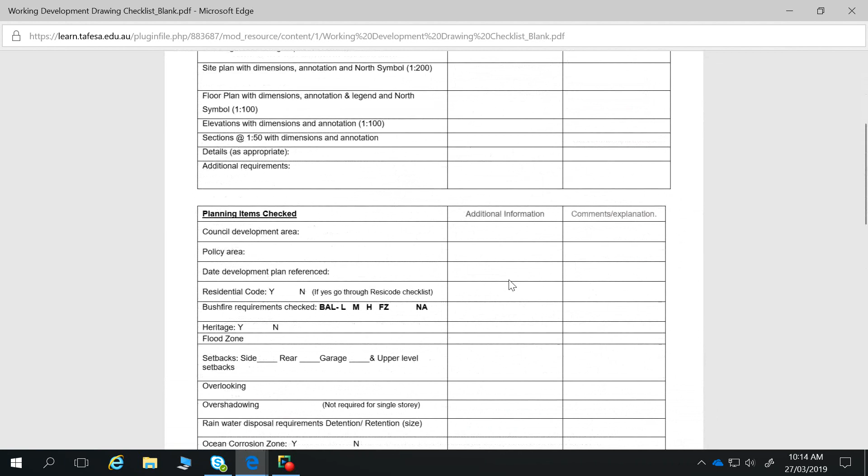I suppose before we look in too much detail about the drawing project, some of the things that are there for you on the Learn site to help you along - there's a development requirement checklist, and that's something you can go through quickly just to find out the sorts of things you usually need. I've gone through and done the sorts of things you would usually find out when you start to do a planning application - what do I need to know before I can actually start drawing it out?

What sort of drawings you need to submit, what you're actually going to go for - is it planning and building, or one or the other? What sort of drawings do I need to do? There's going to be a site plan, floor plan, elevation sections, details - so if you wanted to print that out and just write some notes as you're checking, it's easy, or you can save it and copy things, type things straight into it.

But some just additional notes - so if you see something on the council website that says your site plan must include something, you might put that in there, it'll just be a reminder. That's a quick way to streamline the process so you can find the relevant information and get started. But as you're starting drawing, you don't think, oh, was this what council wanted, you don't have to go try to find the information again, because you've actually written it out. So it becomes part of the client's job folder.

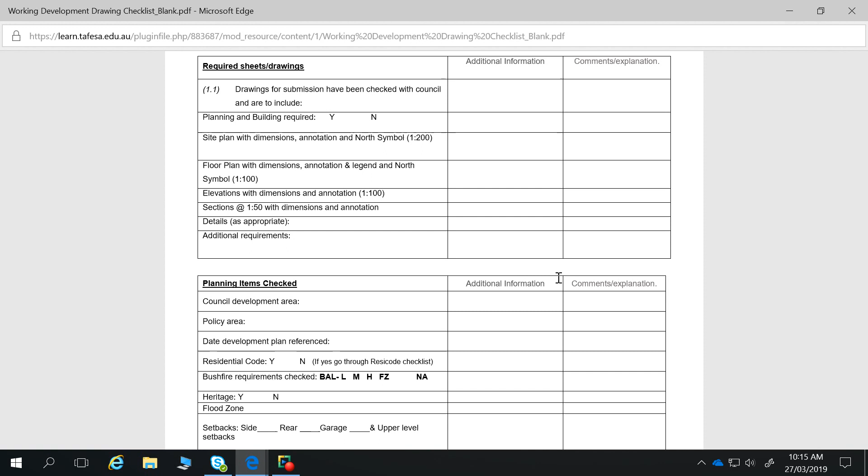And then when you start to get through for planning, what sort of things, what development area is it in? So this is going to be in the Tea Tree Gully area, that's the council area.

Has it got a policy area? What date did you reference the development plan? When you look at the development plan, what date are you looking at it? Because sometimes if a job goes for a year or so, if you've referenced something and you think, is that right? Or council comes back and says something, you can look and say, oh, that's because I looked back then, so at least you know why you've got something different if it changes.

Is it in the residential code area? Now this one won't fit in Resi code even if it is, because it was a larger scale development. The setbacks were different and those sorts of things, so we'll just say NA for that one - not applicable. We've already looked through the Resi code and what it is, we don't need to do it again for this assignment.

Is it in a heritage zone? That's going to be no. Is it in a flood zone?

What sort of setbacks are required? Just have a look in the development plan and see what the setbacks are. So 2-story usually is a metre on the lower level, or 900, but the second story they sometimes require 2 metres.

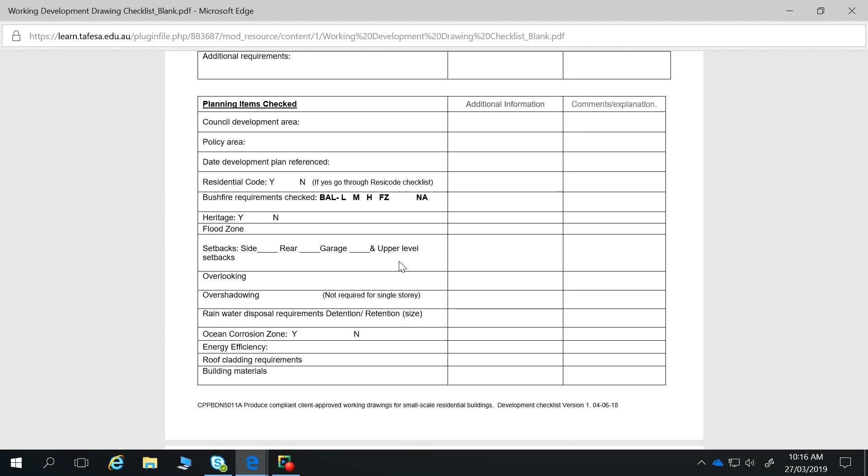Is there going to be, if it's two-story, which it is, any overlooking of neighbouring properties? Just have a think about that. You might need to get that property location browser up and have a look at the location and see whereabouts you think the site's going to look over. Is there any neighbours right there? Have they got some windows on that side, or even a veranda or something like that that you're going to look into? Is there any overshadowing possibilities?

So if there's some single-story places on the southern side of where you're building, are they really close to the boundary? It's good these days that even on Google Earth you can actually see who's got solar. So if there's solar quite close to a boundary and you're building 2-story, there might be some overshadowing possibilities there.

Rainwater - do you need detention or retention tanks, and what's the sizes? It might be that there's a minimum requirement. Usually there's 50 square metres of roof means at least 1,000 litres plumbed to the laundry or toilet. But some councils have a requirement that the rainwater tank can't be more than a certain height, so they don't want it to be higher than 2.4, sometimes it's even 2.1. I think that's to do with they don't want it seen from the street. It's a bit weird, but...

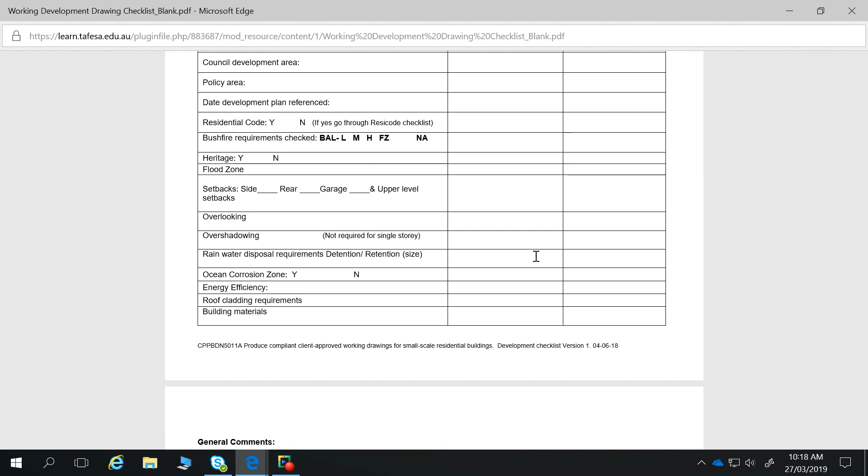Is it in an ocean corrosion zone? This will be no. Any energy efficiency rules or policies other than the rainwater tank? So if there's anything listed in the development plan, any roof cladding requirements and any building materials that they're looking for you to use or not use.

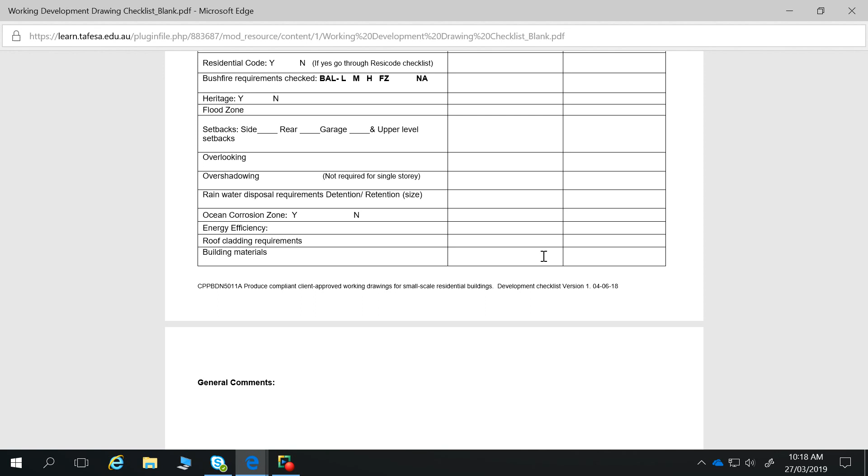And then there's a page there for general comments. Most places at your work would have something like this, that would be a lot more detailed that you would actually go through when you start a job. When a client says, this is my block, or you've decided they bought a block from you, whatever it is, you'd be going, okay, this is the type of house they want. How do we fit this on? What are the requirements? What are our rules around this particular house?

I've also put a site plan in there as a CAD plan so you can see, but I've done it as a PDF down further as well, so you actually get the site plan. We're going to be using this Residence 1 area, so when you get to plotting the site plan up, you can copy all this information, or you probably don't have to have the contours because it was benched anyway, but you'll locate your building sort of around here, and you can have a bit of an idea of how much private open space there was, whereabouts the rainwater tanks are going to be located, visitors car parking, etc.

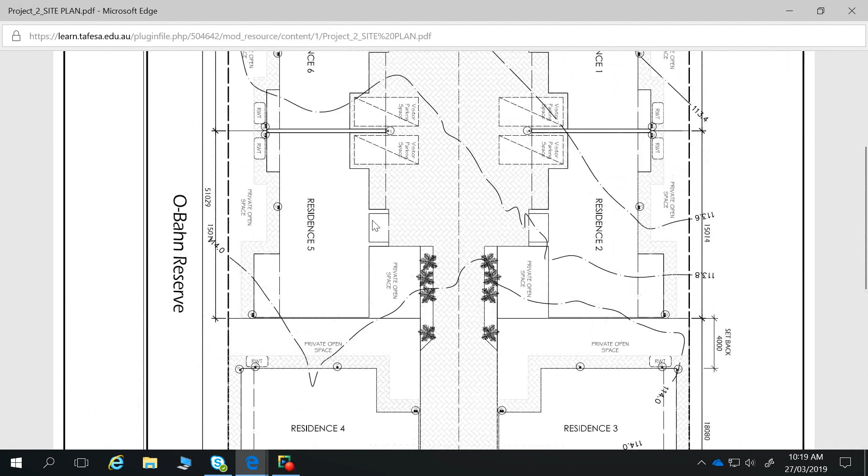And we'll probably still just do the whole site, but we just don't need to plot all the other residences. It'll just be this one here. And it sort of gives you your setbacks and things like that anyway that were used, so that way then you know all the buildings got to fit on the site.

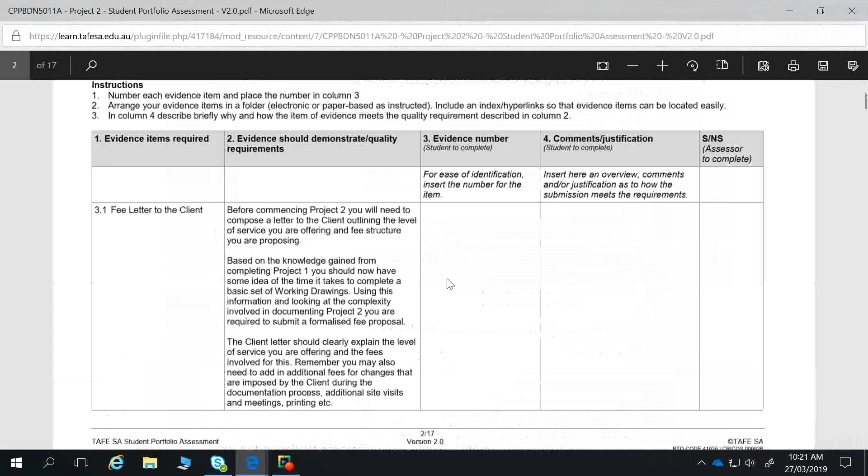On the sketches we looked at quickly last week, which are here in the assessment sheet - just scroll down to the bottom with the sketches. I've actually given you all of those on the design sketches anyway, so these are all the colours and those sorts of things. You can pretty well copy a lot of those notes, they're not going to change for us.

So similar to that, you've got the roof sheeting written in there, the type of garage door, the stainless steel marine white, the PGH Santorini block piers at the front for the portico, and the colours of the texture coating. There's a bit of a feature band around the house as well to break up the big blank walls, and also to hide the joins for the hebel, which we'll talk about today.

Then there's the texture coat colour, cappuccino candy 6, cappuccino candy 1, and cappuccino candy 6 with a sandstone paved block at the front. Wasn't very exciting, the colour scheme of this house, I can tell you now. So you don't have to worry too much about coming up with those - I've given it to you because in a design stage the client would usually tell you what they wanted anyway. We're past that, if you imagine, we're just documenting it.

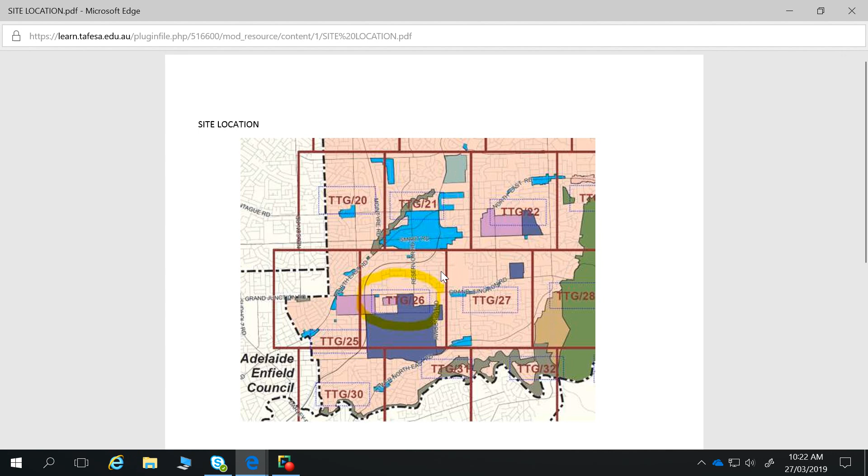The other things in the research there is the site location, so it just gives you a bit of a snip out of where that is from the development plan. I've already put up, just to give you a bit of a heads up, the actual framing and truss information.

Which usually wouldn't get until you finish that letter to the client and those sorts of things, and the engineer - but because it's the first time you're going to be interpreting that information, I'll give you a bit more of a chance to have a look. With the framing details, these are all from an engineer for the actual job.

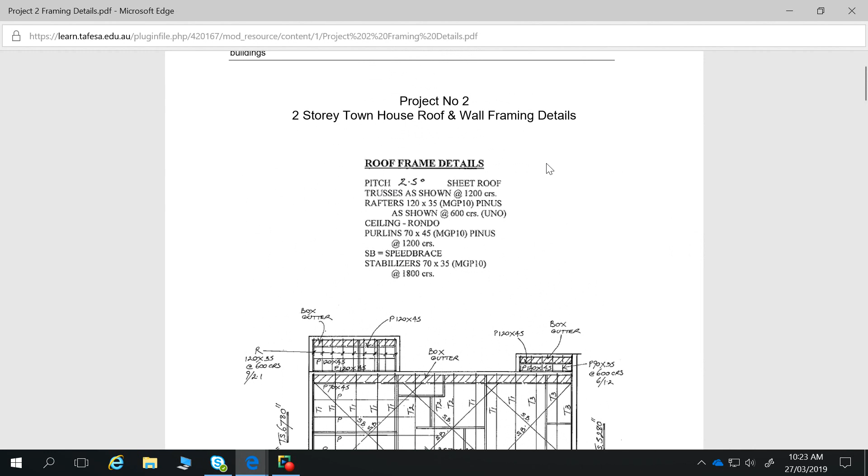We've got all the roof framing information, so have a little read at the top as well, because that gives you some general information - the set out of the trusses, the ceilings, the rondo, the purlins that are going to be used, the speed bracing, and any stabilisers that might be in there. Then on the actual drawing, the sketch from the engineer, is all the details of where those things are.

So we've got all the P's are purlins - you can see here there's a P 120 by 45, so they're these purlins running this way. We've got another purlin there, and we've got some rafters at 120 by 35 running this way. So the lower roofs were actually rafters and purlins done traditionally.

And the main roof up the top was trusses, so that's T1, T1, running this way. Then we get these T2s, three of them, because they run right through the portico at the front, so they were longer. Then back to T1s, and then the shorter ones, because of this cutout of the building here, are T3s. They all have the same pitch, but some just extend longer or shorter to reach the end of the building.

Now they had a cutout at this end to allow for the box gutter, so they were actually manufactured with that allowance for the box gutter. We'll look more at these details as we start drawing, but just so that you've got a bit of an idea of what it's talking about.

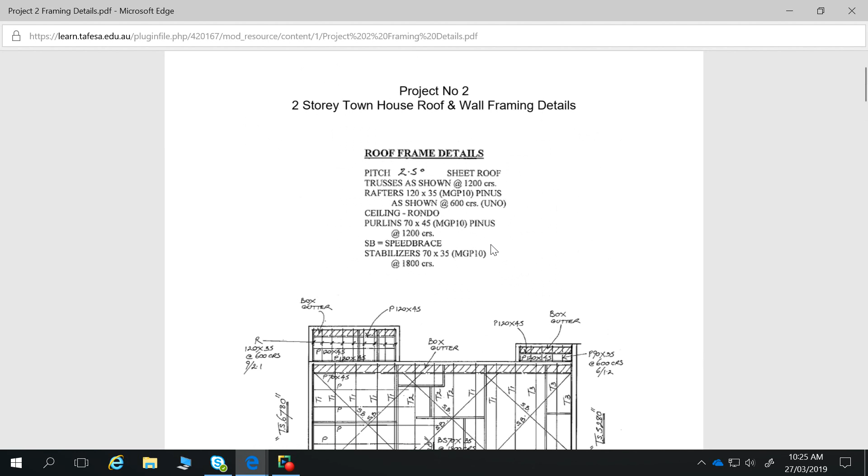The SB and all these ones going this way is the speed bracing, so it refers to speed bracing here. You won't have to draw any of that in, you just have to allow the right height for the trusses and do the box gutter detail. So in your section, if you're drawing the location of the trusses, you'll now know that they're at 1200 centres, so you want to have them spaced like that if you're showing something.

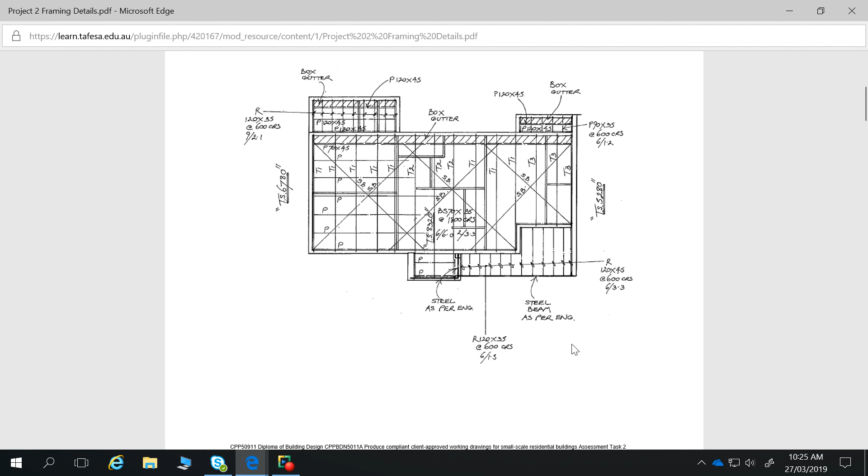And the front little roof over the balcony is done with rafters as well, and there's a couple of steel beams there that you'll just put as steel beams to engineer's details in your section, same as this note here. It's got your wall bracing.

It's also got the floor trusses, so a similar sort of drawing that shows all the stabilizers and different size trusses going through. Where you see the packers, it means the trusses were actually smaller, allowing for a step down in the wet area, but where they run past the wet area, they pack the top of that truss up so the floor becomes level with the bigger trusses again. So that's what the packing is.

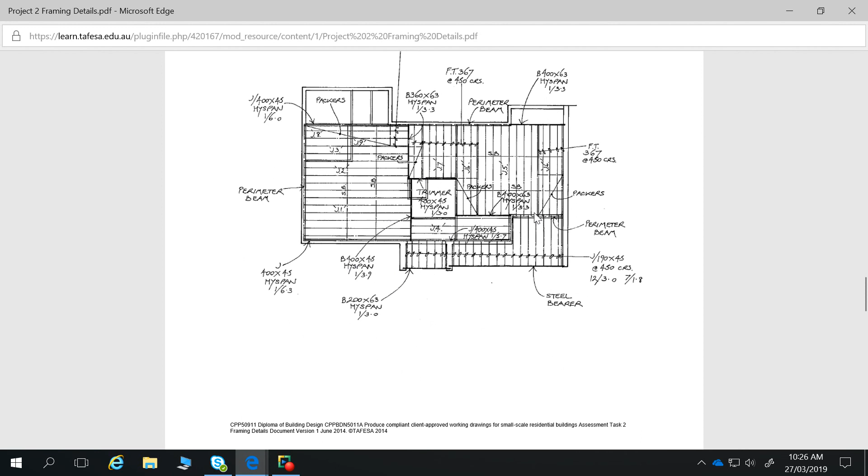There's also some quite big Hyspan 400 by 45 beams around where the stairs are, and there's actually a perimeter beam that goes around as well that's quite big. So the perimeter beam is 120 by 35 there.

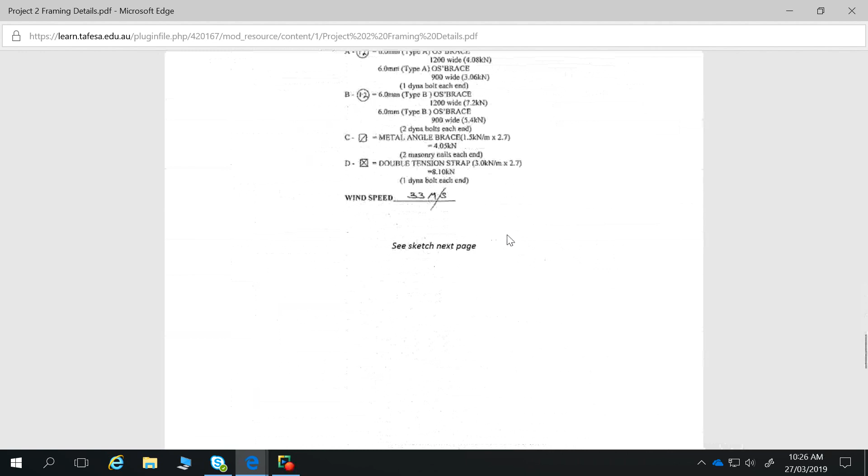More bracing for the other levels. And the truss information here has actually got all the truss info that came from the engineers, with the heights, the sizes, and the lengths. So you've got your cutout for the box gutter at the end.

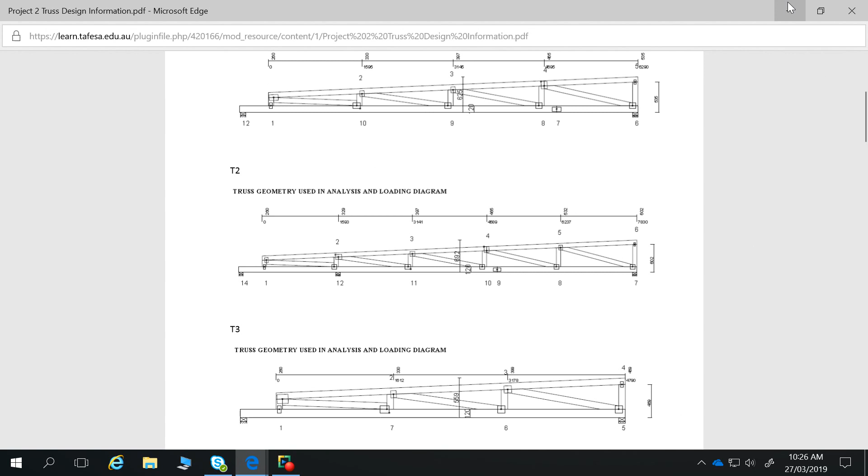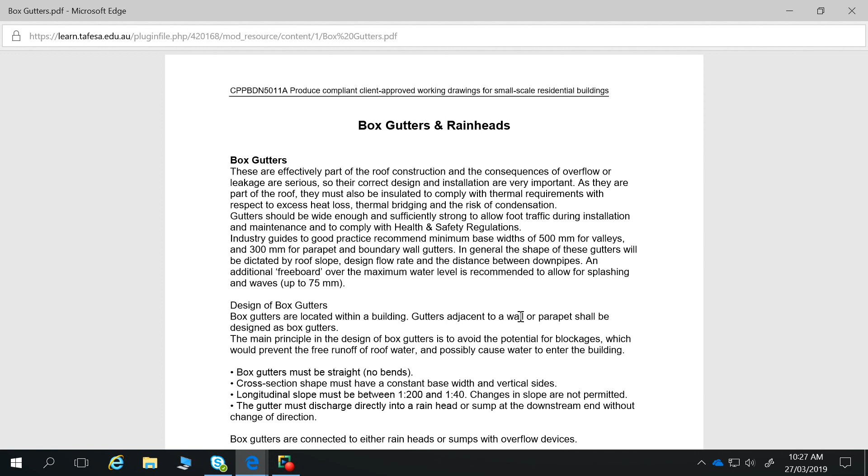When we get to doing the box gutter as well, I've got a fair bit of info, so we will go through that in the morning session of how we design box gutters. I have given you the sizes in the specification that you need, but I'll talk about where that comes from and give you an insight of how we would design a box gutter. So that sort of info I'll leave up there as well.

A link to the Hebel site, because the cladding is Hebel.

So we're in this multi-residential area, and when you go into multi-residential, we're going to be using an inter-tenancy party wall. That's going to be the party wall on the end where the next unit would usually be abutting. We don't have to draw up the next unit, but we need to show the party wall. And we're then also going to use some external wall cladding.

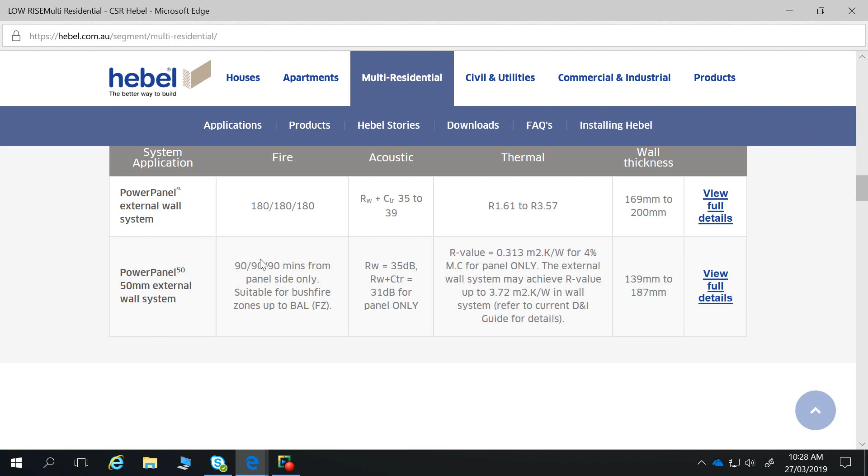So this is sort of some units that have been done as well, and there's lots of details through here. So we're going to use the PowerPanel external wall system. The PowerPanel50 wasn't around when I did this project, so we'll use this traditional one here.

And it gives you a heap of information there of how it looks, a bit of a rundown of that sort of thing, and you can go in and actually download one of the manufacturer's details if you want.

Hebel installation is the design guideline, so it saves you sort of looking. I've already just copied it down and downloaded it for you, so you don't have to wait for all that to happen. One of the most important things about this Hebel, there's two things - one I mentioned last week, it can't be cut shorter than 300.

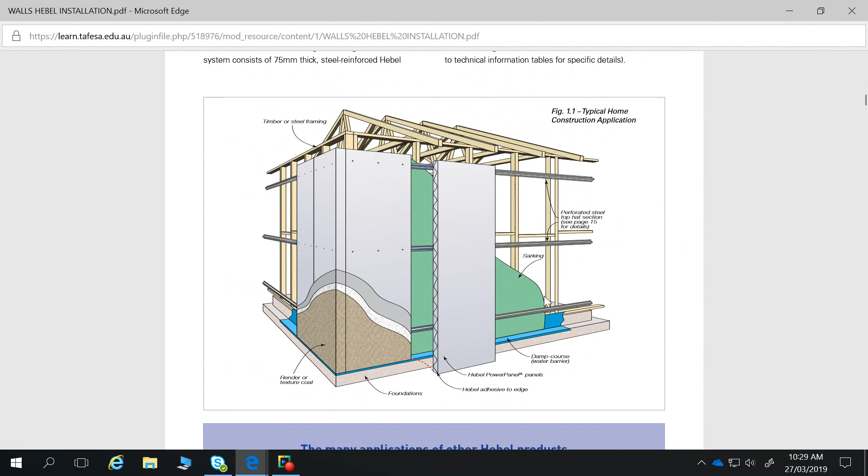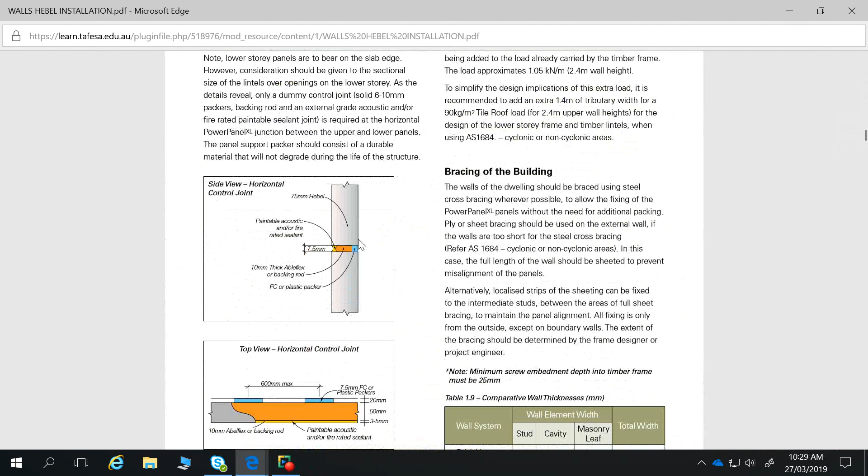When it's fixed to these top hats in a two-story situation, you've got to allow some control joints. Now what tends to happen on a two-story house is that the panels are so heavy on the top floor, and we're using pine frames, the pine actually shrinks after a while with the weight. So they allow a 25mm gap between the top panels and the bottom panels. So on the top level, the panels are placed, and when they do the bottom level, depending on which one they do first, they leave a 25mm gap around the building.

Obviously we don't want to leave that gap visible, but usually what they would do is either put some silicone in there and texture coat it so it looks smooth, or a better way is to put some sort of foam extruded band around the building. That's what we did, because one of the things council didn't want with some of the large walls was just these plain big rendered looking walls - they wanted a bit of articulation. So by putting the band there, it achieved two things: one, it broke up the spans of the wall, or the height of that wall, and two, it allowed us to have that 25mm gap.

So the foam band was actually stuck to the top portion of the top panel, but on the lower piece it was glued there. On the bottom panel, it just sits over the gap, over the top. So when they do the texture coat, they actually slice it underneath as well and put another bit of silicone. Then as that frame shrinks, the foam panel just drops down a bit, so you don't actually see it squeezing. If you just put silicone in there, what happens when it drops is it actually bulges out. And if you look around at a heap of Hebel apartments over the last year or so, now that they've started shrinking, you really see that line because the silicone has bulged out a little bit.

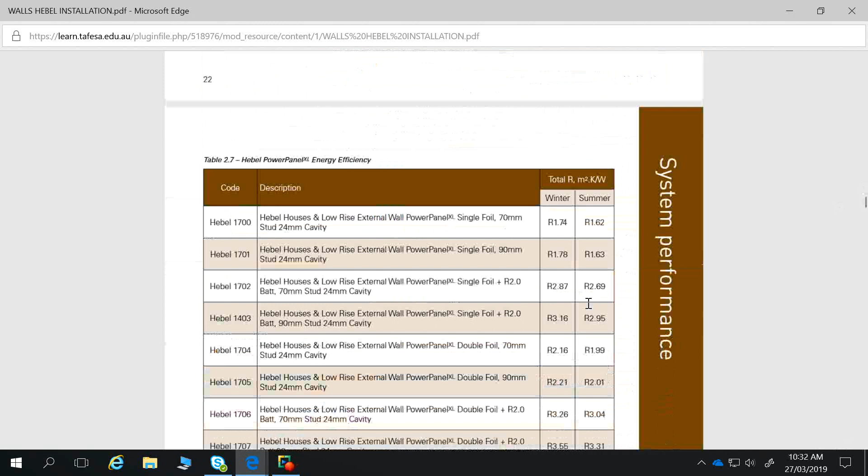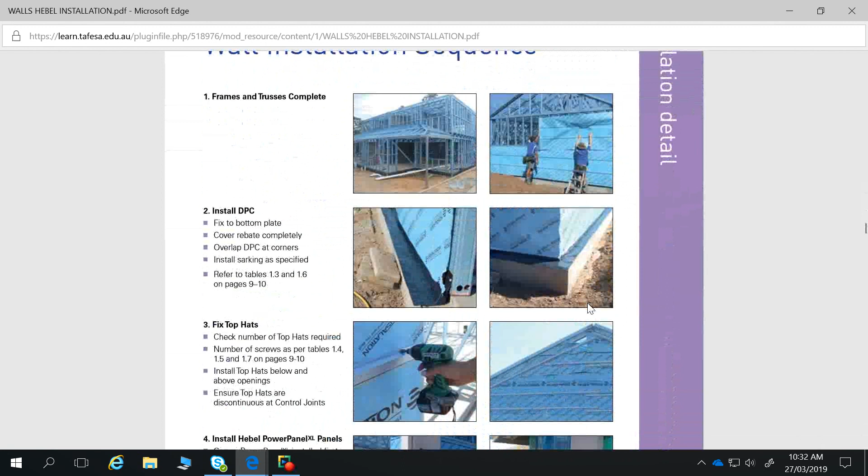There's a couple of images showing different ways to attach the panels, etc.

While I'm scrolling through here, I'll give you an idea of where the two-story examples are. So it comes through here - this is that gap that I was talking about.

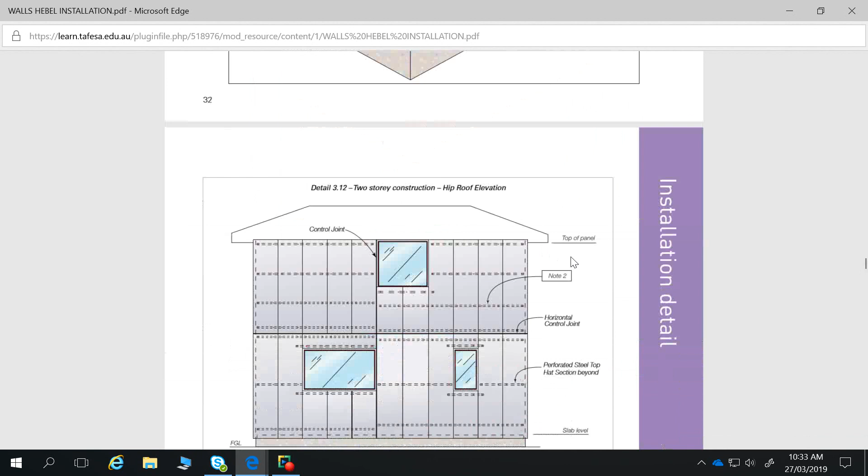It sort of shows you now talking about horizontal joints and locations for windows, etc., and trying to come up with some good locations. And this is that deflection gap that I was just talking about between the two panels. So it's all in here.

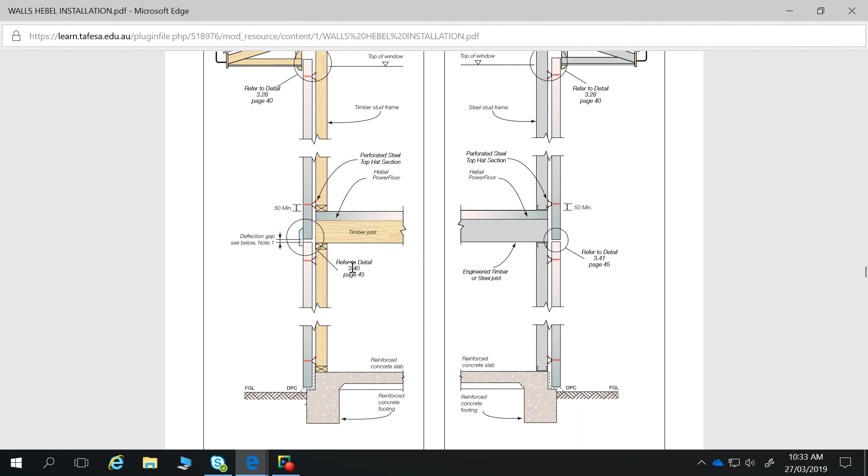I just sort of point you out to it. It actually tells you to refer to the detail on 3.40, page 45. So we'll head down to page 45.

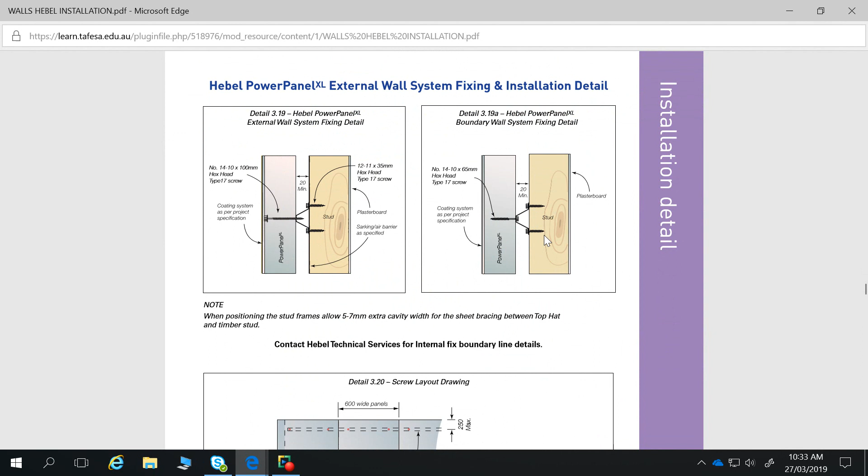Installation as well, it's on the power panel on top hat, and obviously the top hat's screwed into the stud, so that gives you a bit of an idea of how it's working.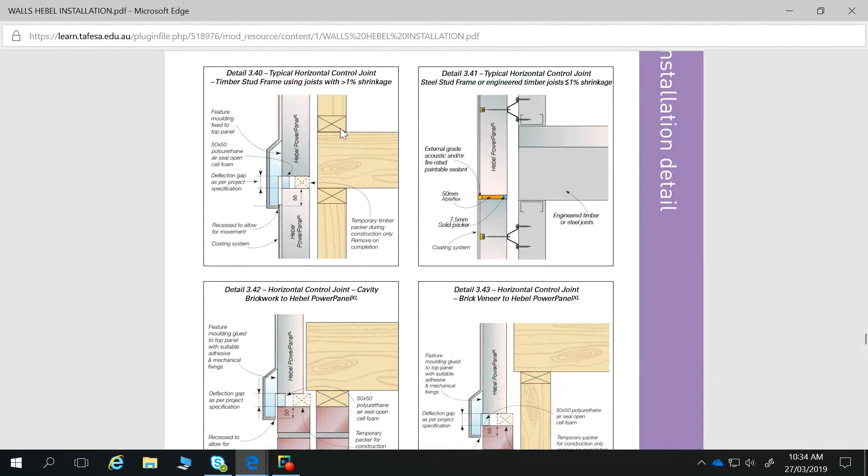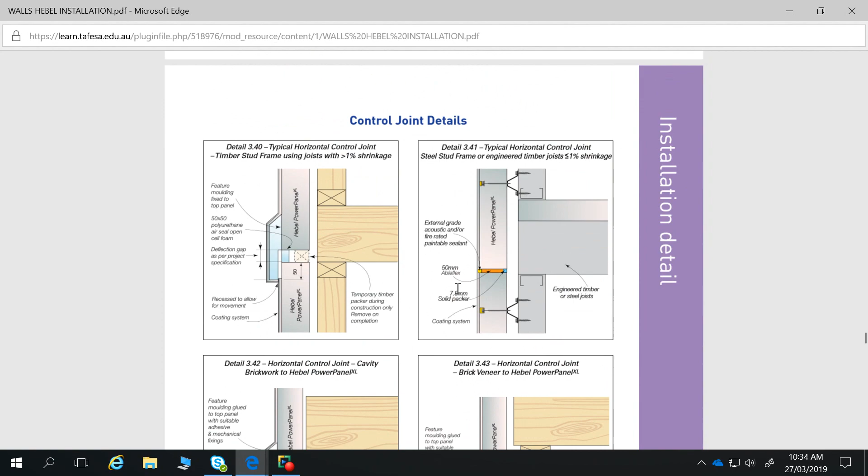So here's your information on what's happening with this area here. So it's more that diagram there - lots of little sketches and details for how the panels are set out.

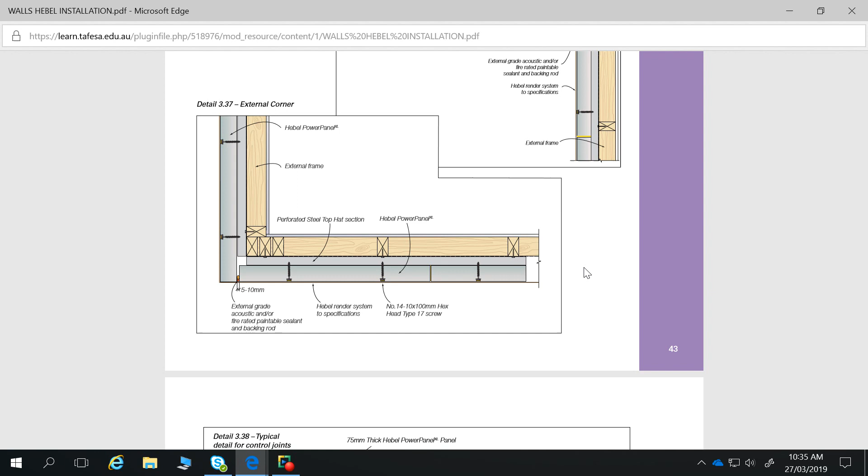This is what I was talking about with the set out of an external corner last week. One side of the building is going to come along, the other one's going to be butted up against. So you've got to decide which side of the building might work better for when you're laying your panels out, because at some stage when you go along the building, there might be one that's like 295, and you think, well, I've got to allow another 5mm, so it's not 300. So if you moved it back the other way, would it work better if this one came right along, etc.

I don't know whether this brochure actually gives you - that's it, yeah, it does. They give you this miscellaneous detail, which is a panel layout drawing.

So when you're using Hebel, one of the things that's a good thing to do as you're starting, once you've got your initial floor walls drawn in, or your floor plans done with all the walls in, if you place your windows within the areas that you think they're going to go, I would tend to set up a grid.

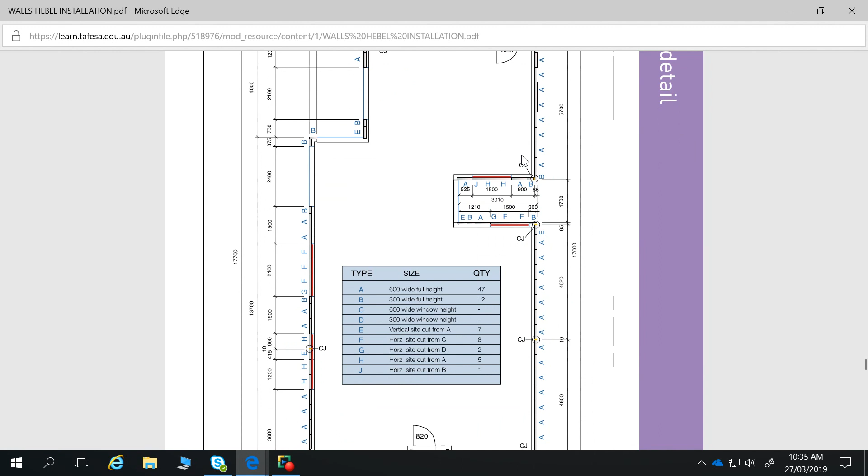And if you set up a grid around your drawing in both ways, that's 300. Straight away you'll see if any windows are going in and if the panels need to be moved. And that's essentially what they're sort of doing here, is that you can see each panel and which size they're going to cut them to, and where your control joints, etc. are.

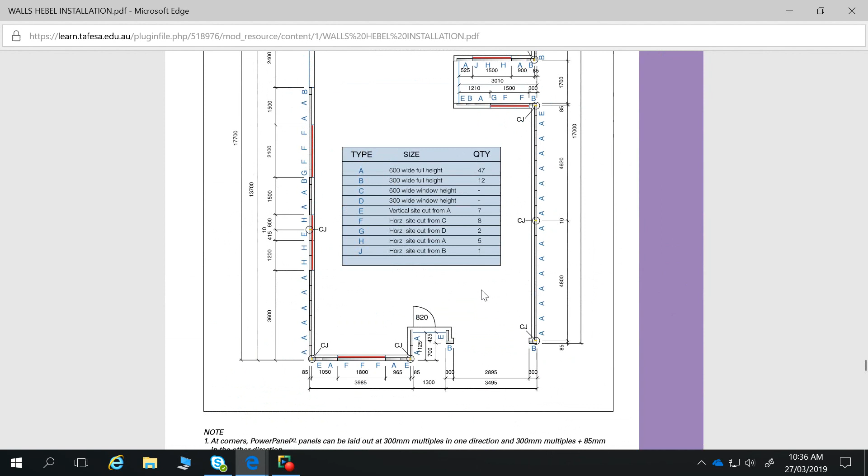But the main thing for us is to actually see, if we set up a 300 grid everywhere, you can actually say, right, there's one that's now only 220. What can I do along that wall? And it allows you to shift your windows quite quickly to be within the grids as well, so that way you don't have one that's half in and half out sort of thing. So it's quite a quick way to do it. They give you that, that's a bit of a guide of setting it out, so that it makes it much easier on site with heaps less waste.

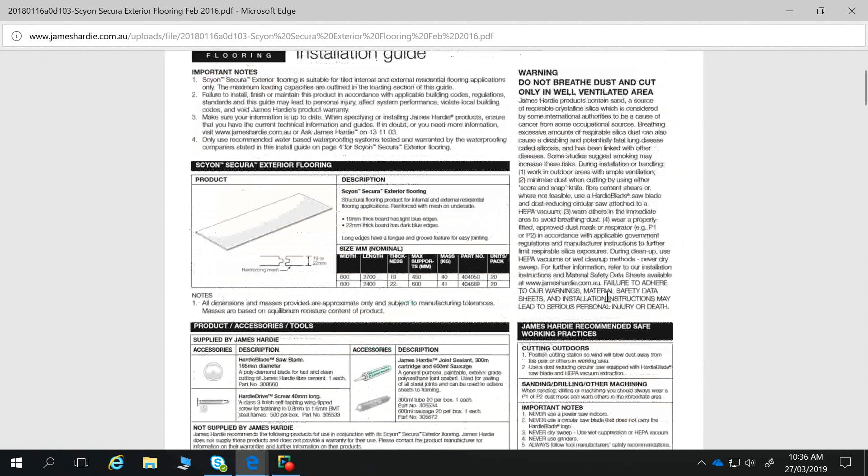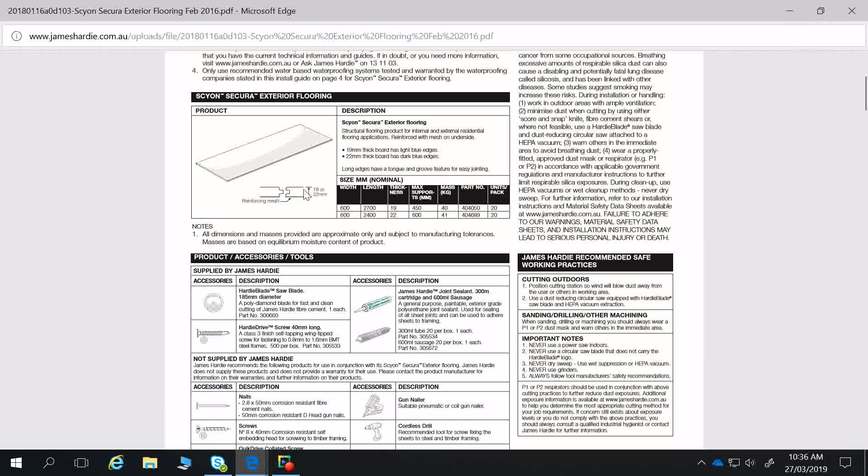The other product we're going to be using is the Scyon flooring for the decks, or the one-tiled balcony, the main deck. This is a compressed sheet type of product with a tongue and groove that allows it to go together, but it's a perfect substrate for a sealed floor, so moisture won't go through, and it's a good substrate for tiles, so it's going to be a tiled front deck as well.

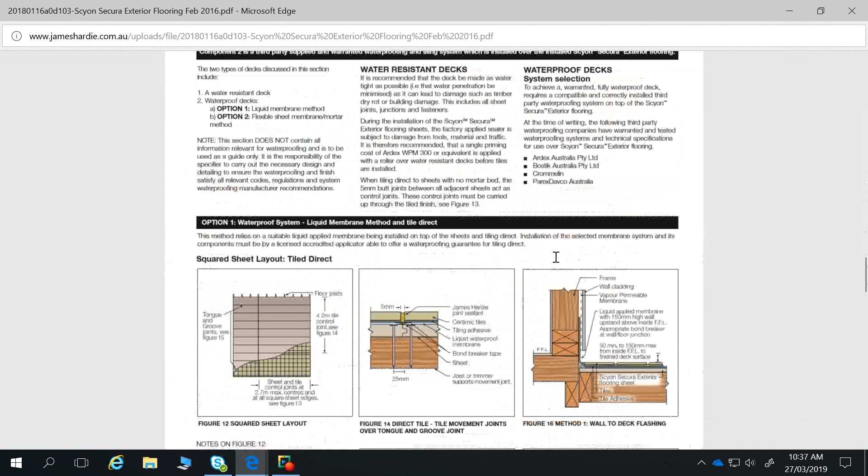This is when you start to get into your detail. I just pointed this out so you know how we're going to use it, this wall to deck flashing detail, for the front deck. When you do a detail of the front deck, it's copying this, but instead of the front cladding being so thin, it'll be the Hebel cladding. So the Hebel will come down here, and then you'll have the Scyon flooring on the floor joist at the front, wet area membrane, waterproofing membrane, and then our tiles above that.

One thing to note here is that it says there's 50 to 150 max from inside finished floor level to finished deck level. So there's a dimension there, 50 to 150, meaning from this finished floor level, there has to be at least 50.

The reason there's a range there, instead of just one number, is that it's dependent on what wind speed area you're in. The higher the wind speed, so if you're closer to the beach, N3 and that sort of thing, the higher that step has to be. It's all to do with rain hitting the balcony and the wind pushing it up underneath the doors into the house, because that's where it all starts to rot and the carpet gets wet and all those sorts of things.

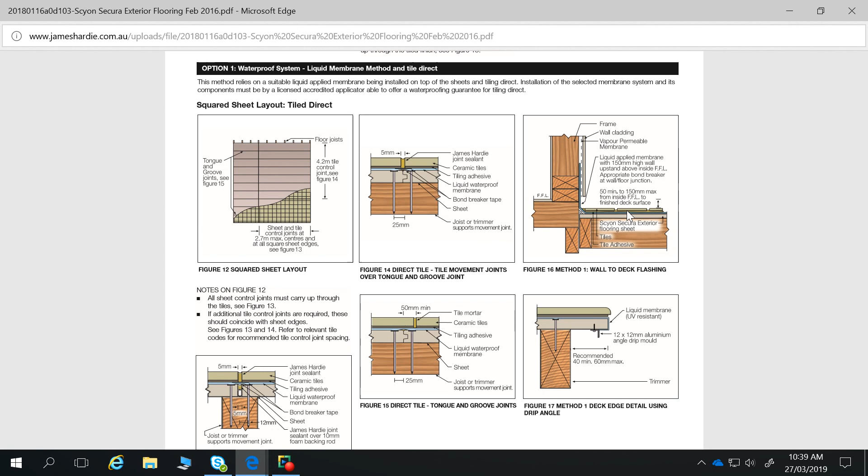The other detail worth looking at is the one straight below, the edge detail for the deck. One thing to remember is we're going to have an engineered beam with the joist sitting on top of that. When water rolls off the front of a deck, the last thing you want is it dripping down the front face and returning back underneath, hitting the timber supporting the deck. So to make it drip off, there's a couple of things you can do, but this one's a really simple detail: they put a little equal angle aluminium extrusion in there.

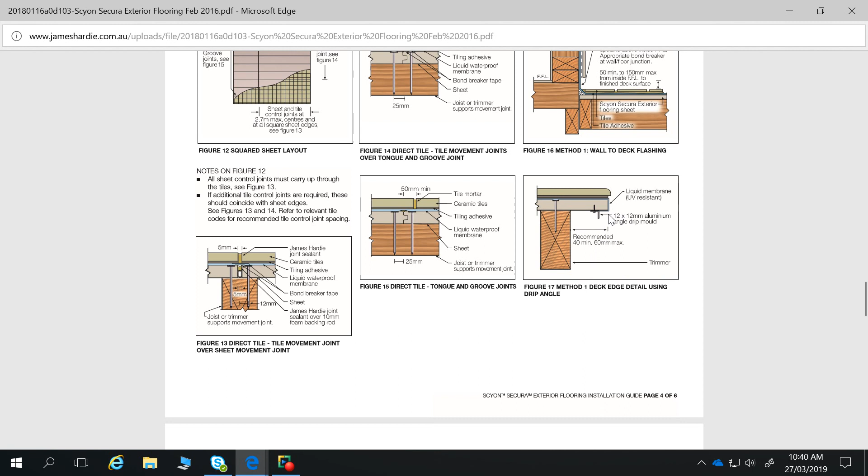Let me get that a little bigger so you can see. Can you see that little extrusion there? It's screwed in underneath on the Scyon cladding, so when they put their waterproof membrane, it comes around the edge here. Any moisture that's going to drip off here now runs down, and as it starts to run, it hits that extrusion and drips off there. That's quite a clever little detail.

Other ways they can do it, if it's not Scyon cladding, sometimes if you've got exposed rafters on top of the skillion roof, like the front edge that's going to roll back, they put a saw cut through underneath, so there's a little gap. As the moisture starts to run down, instead of running through and getting into your cladding inside, it hits that gap and drips off there. So there's lots of ways you have to think of how to stop moisture getting in.

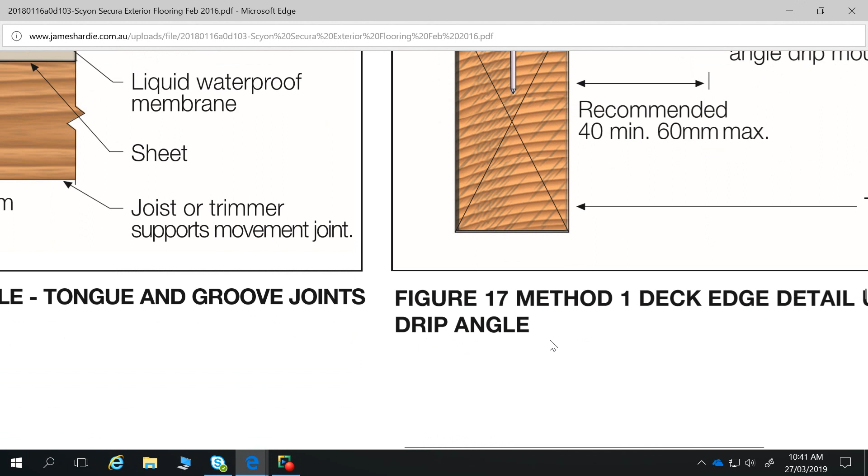Other times, if you stop this cladding a little sooner and had it running flush on this edge, you might actually tile the front edge, so the tile wraps around and comes down here as well. The waterproofing barrier would still be in here, and you'd still put some of this substrate on there. If you imagine that wrapping around this corner, you'd hang it lower than the timber, so that front face acts as the drip as well. It just depends on the detail you want.

I would probably, on these ones, actually put a tiled front face. That's what we did, which the tile hung a bit lower because it looked a bit neater, since the actual colour of the tile came around the edge as well and finished it off. You didn't tend to see the drip marks on the different colours. It was such a light paint finish, we thought if it was painted the light cappuccino colour, almost like a darker cream, you would see that water marking. So we ended up putting the tiles over so it didn't stain it as much.

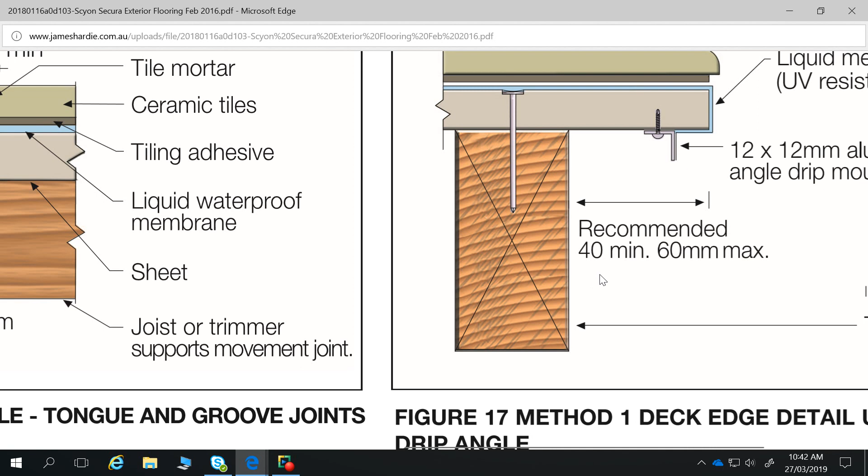So there's things like that you've got to think about when you're doing these slightly more detailed buildings - how we're stopping moisture getting in, prevention of water damage. I've linked the Hebel installation and the Scyon straight to those brochures that you need, so it's not a wild goose chase taking up too much of your time trying to find it through the sites.

We talked about the openable windows as well, so the upper story bedroom windows will need to be changed from the sketch. That's one of the things I've done on purpose, left them so that they do need to be changed. You'll have to have some sort of lock at 125 or a screen, you decide. But have a look at that brochure for the details - it'll save you from going straight to the NCC. You can read the NCC detail about it as well, but that gives you a bit more explanation. We'll have to check all of the windows meet light and ventilation rules as well.

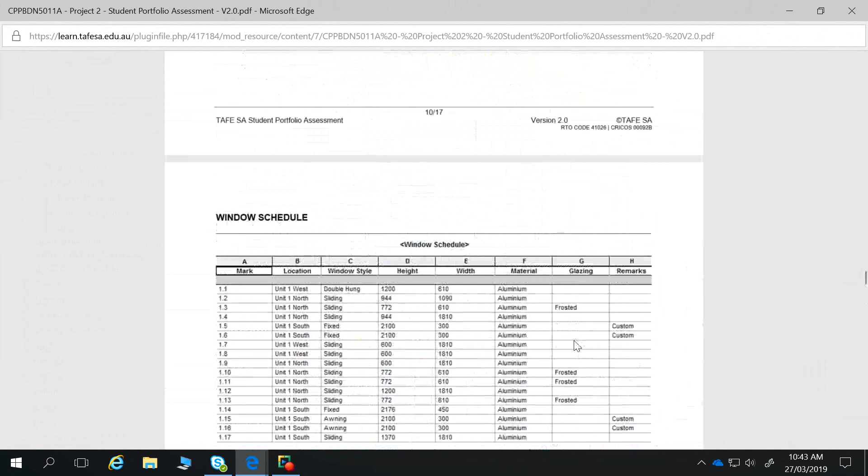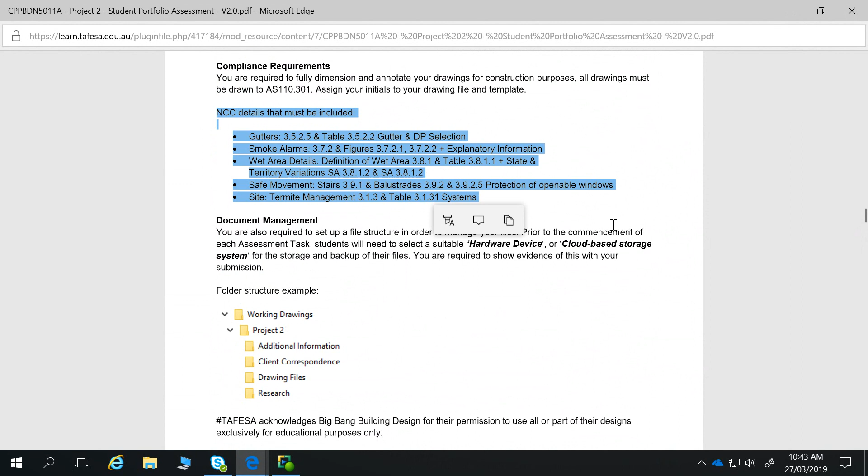So the NCC requirements for this one are these ones here, which is in the assessment task. The safe movement of stairs is the one I was just referring to, balustrades and the protection of openable windows - that little safe movements area is about that. The termite protection is going to be a note.

It's a slab, so one of the ways we protect it - it's a visual barrier that helps with the protection of termites on a slab. Does anyone know what that is? From the paving, what do we do with the edge of the slab? Between the paving and the damp course. Yeah, that's right, Nick.

So there's a 75 minimum from the top of the paving or the concrete path around your house to the bottom of the rebate. You've actually always got 75 mils of clean slab to see, so that when you're walking around your house and you see a little mud trail starting to go up, you know you've got a problem - hopefully before that happens, so it creates a bit more distance. The way termites like to get in is that they don't like light, so they build a mud mound in front of them and go up. So if there's a fair distance of light, chances are they won't try to get up there unless they're really hungry. So usually your neighbour's house will get eaten before yours if yours is all right.

So termites are always around, it's just whose house has got the weakest entry point, that's where they're going to go. So that's actually quite important to put on our details.

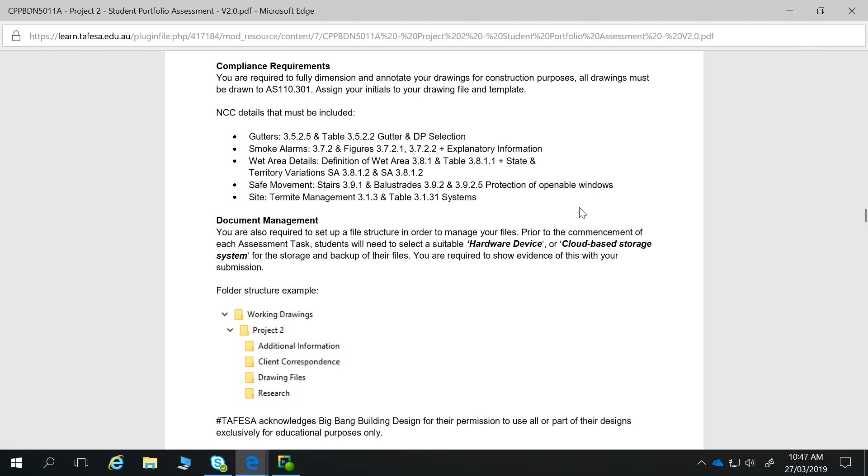Folder structure as per the last project, but it's going to be a new one with project 2 information. So this one's going to have some client correspondence in there as well. We went through all this detail quickly last week, but that's that.

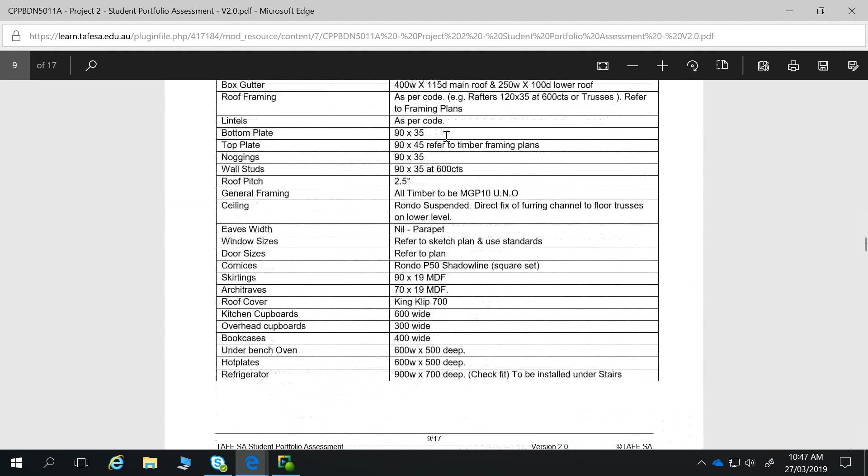As you start drawing, have a little look and get some information out of that. That's just so you know what the site looks like, but use the PDF and the CAD drawing when you start doing that. That's on Learn separately, it's a bit clearer.

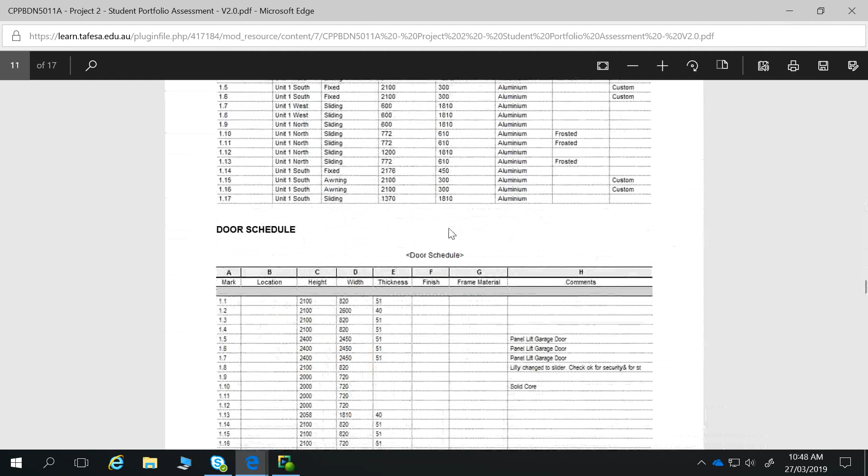Your window sizes are all in there as well, but these are just quick sketch window sizes, so make sure they are standard. Use one of the brochures from A&L or Stegbar to come up with your standard sizes. You can change the bedroom windows so they comply as well if they need to be a little bit not as high, so you can take some width off the bottom or some height off them.

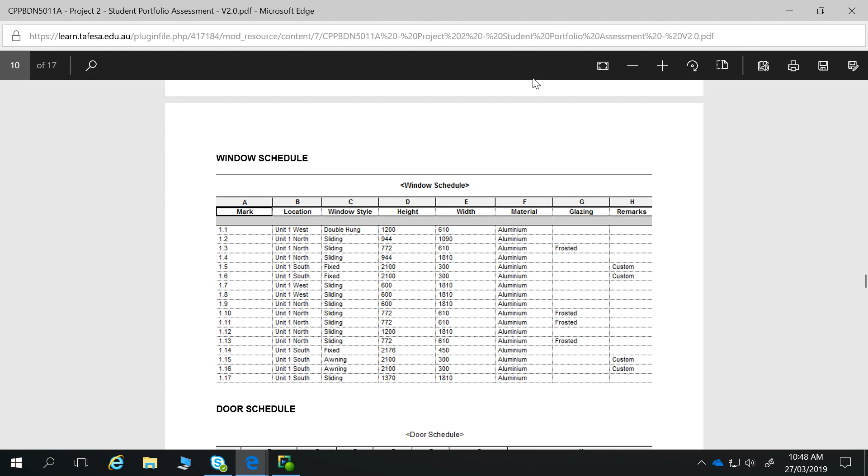The thickness as well, in here these are obviously just Revit windows that have been placed in there. Thickness for residential doors is 35, so make sure you change that, or don't show your thickness on your schedule.

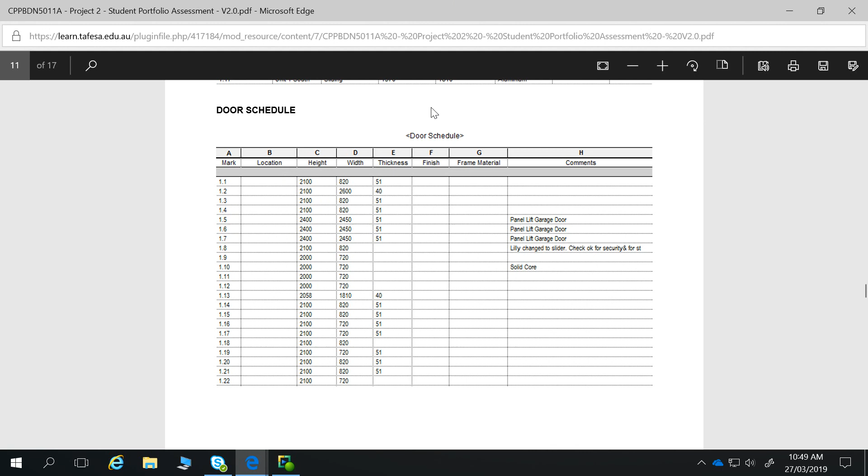Same as what you did for the last project, any windows that are frosted or obscured need to be shown, and any safety glass for the ensuites or bathrooms needs to be shown on there as well.

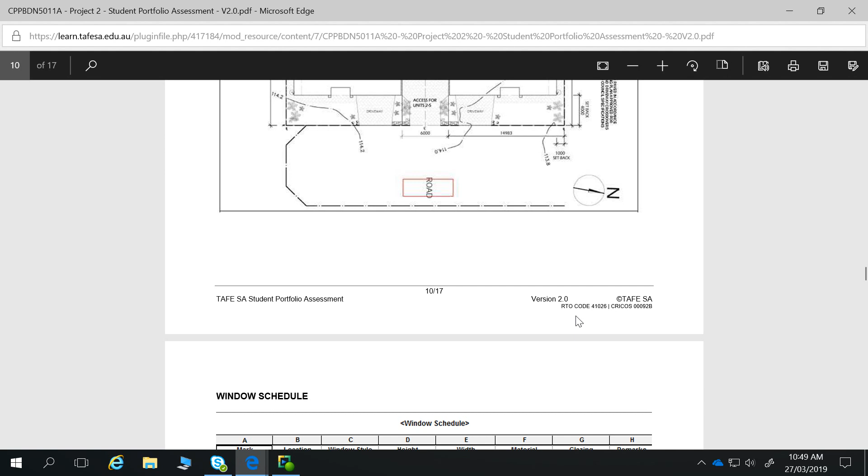Now, the other thing I've got there for when you start drawing up is a cavity slider door family for internal sliding doors, because this one had quite a few. It's in that zip file, there's also the rain head to place on top of your downpipes. You'll probably need the door pretty quick, so you could download those and keep it in your folder now as well.

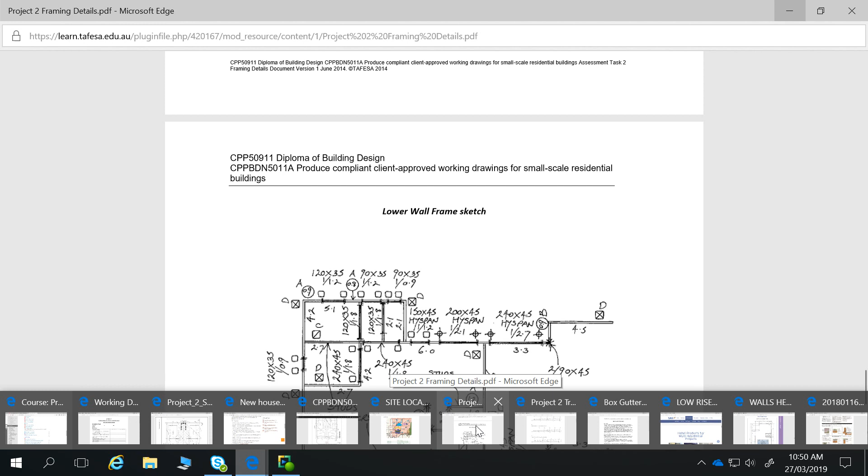If we quickly look at the floor plan sketch here, you can see downstairs there's a sliding door going into the laundry, a sliding door going into this hallway that takes you out the back door, and a sliding door to go into the toilet. So there's 3 there, plus a sliding door between the garage. So there's 4 sliding doors on the lower level internally.

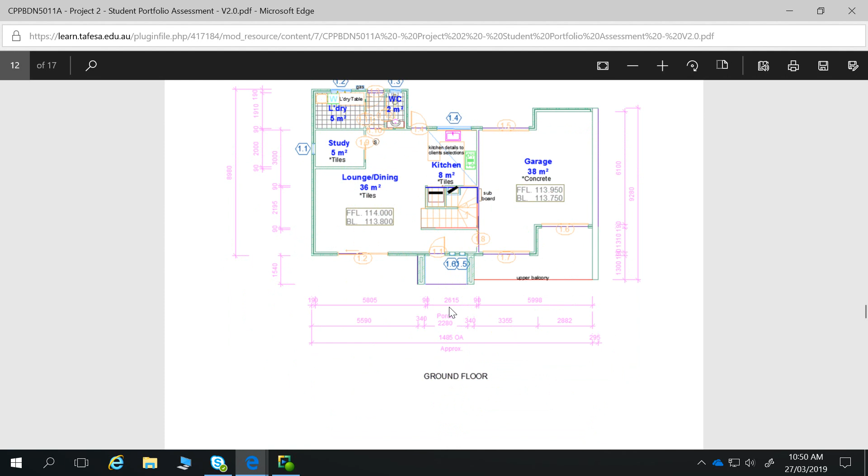And upstairs there's a sliding door here on this storage area, and a sliding door in the ensuite. So there's quite a few cavity sliding doors in there.

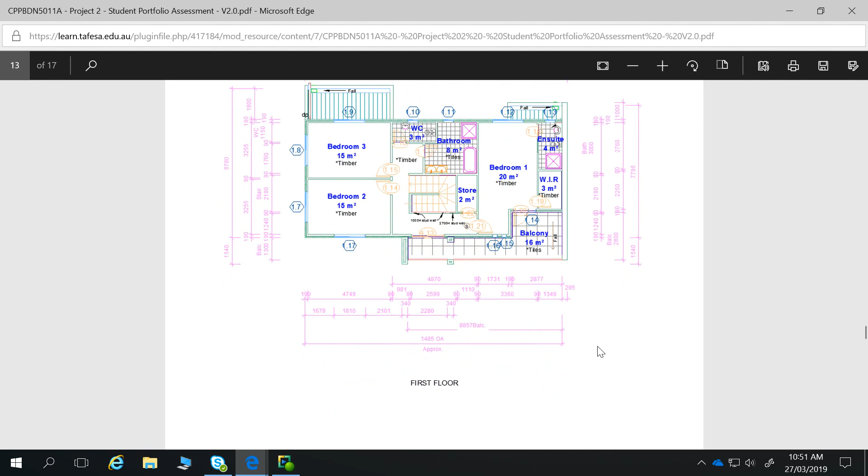Any questions about any of those details so far? It's a pretty big project, but you've got all the information you need, so don't be too overwhelmed by it. Just start where you usually would, looking at the development plan, get some ideas out of that. Anything that throws up any curveballs, you'd be able to ask me and say, it says this in the development plan, what do you think?

So I'll act as the duty planner, I suppose, and that's what you would usually do when you're starting to draw. Ask lots of questions to council, because before you start doing too much, if you're not sure, they'll soon tell you whether you can do something or not, and that's their job. That's why they're there.

Yeah, start having a look at the level set out, drawing up your walls, making sure that's going to work. Once you've got that done, it'll be just really drawing through, looking at the specification. We'll get to the details eventually in the sections. When we get to the section details, I'll show you some more examples of the actual drawing, so you get to see what the details look like.

But we'll definitely do sort of 4. As I said, we'll have 2 sections through this one, one through the stair area and one somewhere upstairs that shows the front balcony, and that'll show the box gutters as well and the front balcony in that section, that we can then do call outs for those. So council would always want wet area details, so front balcony being one, we can get our balustrade height from that, stair detail, box gutter detail, and probably an ensuite or something like that as well.

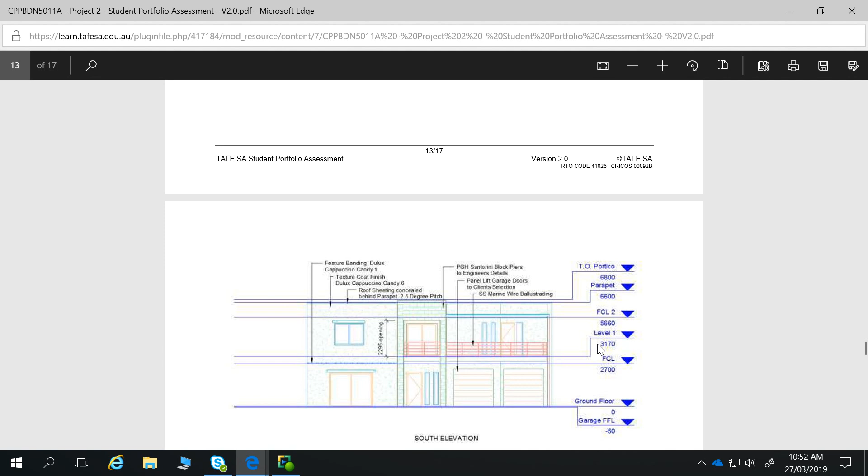So in terms of what we're starting today, once you get your planning drawings going and get all your checking out of the way in terms of what council wants from that checklist, it'll be a site plan. It'll be a very loose site plan, just showing where the building is positioned, the setbacks, and the access from the road.

We'll show both floor plans, but they won't have that much detail. A couple of dimension strings on each side will be plenty. Windows in the position they'll be in, doors in the position they'll be in. Stairs, but not necessarily accurate stairs, just showing that there's a staircase there, so we can work out the detail later for the building rules.

Elevations, really just showing the overall height of the building, the articulation, what's happening on the front balcony, where the windows are, colours. We don't need any sections or details for planning, so that'll really be it. Then same thing, we'll save those files and keep working through sections, details, and a bit more information on the floor plan as you go.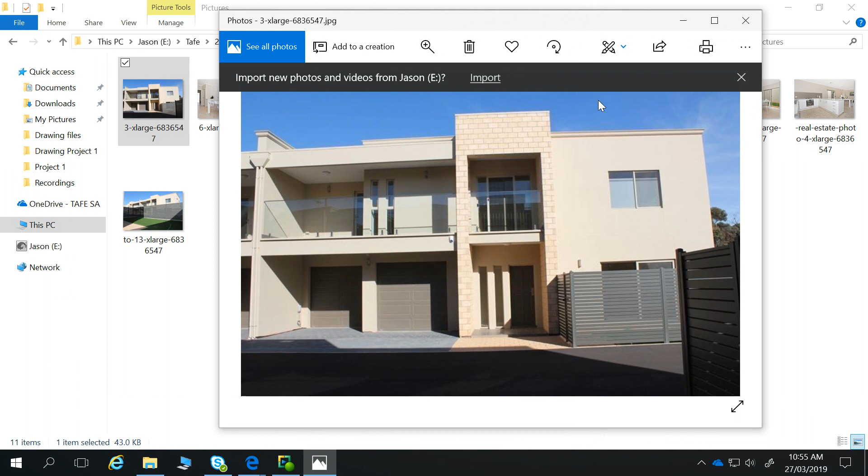So that's just an image to show you one of the townhouses - the opposite one to yours. That's looking straight across the front of the one we're drawing up.

A couple of things changed on site after we'd finished our job - they changed the balustrades to glass. So we're not going to change those; we'll still use the marine wire as we've got there.

Pros and cons of both. Marine wire probably has a bit more climbability for children, so it can be a bit riskier. It probably didn't really change in terms of privacy compared to the glass.

On the front, this little roof on the front balcony, we actually had an eaves gutter so you could see the roof and the eave. The client hadn't realised we'd done that and changed their mind at the front. As the builder started, they said they didn't want to see any roof sheeting, so they capped the front and put a little gutter inside, which ran to this rain head here. So we still had a rain head, but our front eaves gutter ran into it.

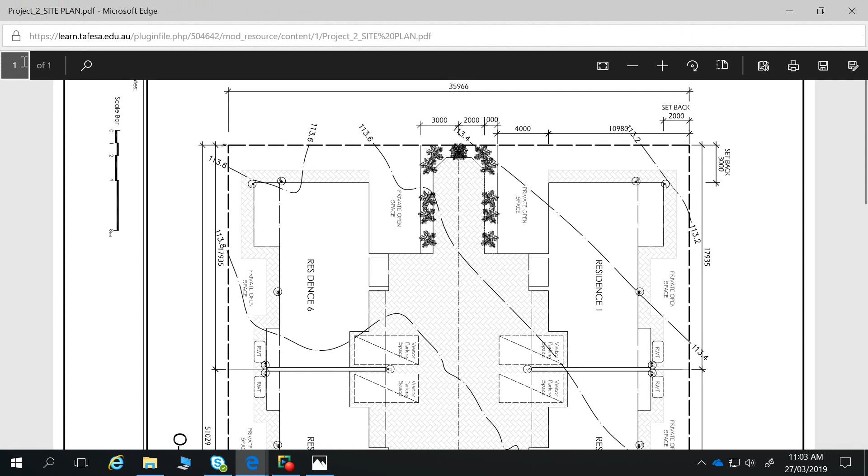So if we look at the one that you're drawing up, we started with one of them. Once we had that right and we knew that distance would fit in there, that one was mirrored, and those 2 were then mirrored across the other side, which became 4. So it wasn't actually that much more work to draw 4 than 1, because they were identical - there was no 'this one wants this and this one wants this.'

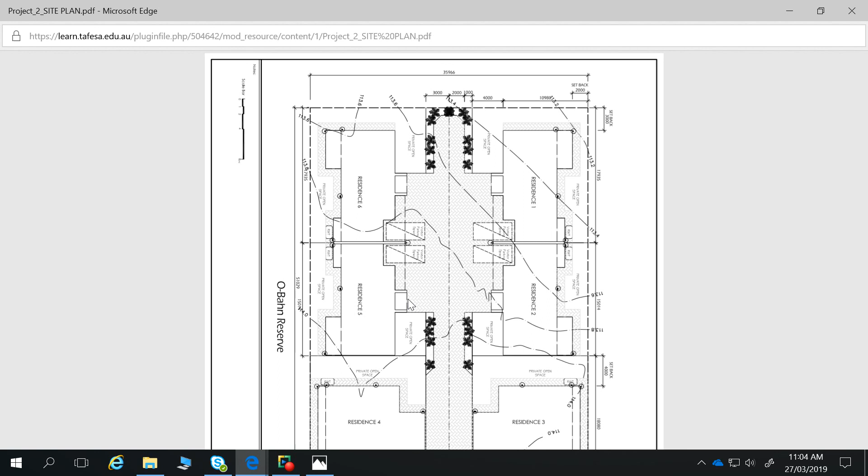In terms of if it was someone that wanted to allow clients to do different selections and kitchen and all that, you'd still have exactly the same building - it'd just be the selections for tiles and finishes that would be different. So it's not that much. And the front 2, same thing - we did 1 and flipped it to make 2.

So when we quoted this job up, you'll quote it up as though it's just going to be 1. Even though there was 6, we sort of quoted it like there was 2, because the design was only really for 2, and then we just mirrored it, which wasn't a heap of time. So it wasn't as if we said, we've got to draw 6, like there's 6 times whatever amount it was.

So that gives you an idea of what you would do if someone has 2 - you can add a little bit more on because they're getting 2, but you don't have to do that much more work.

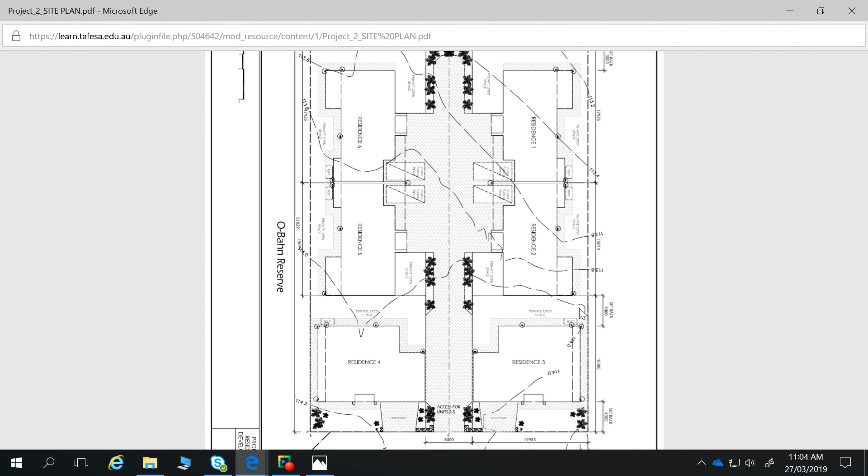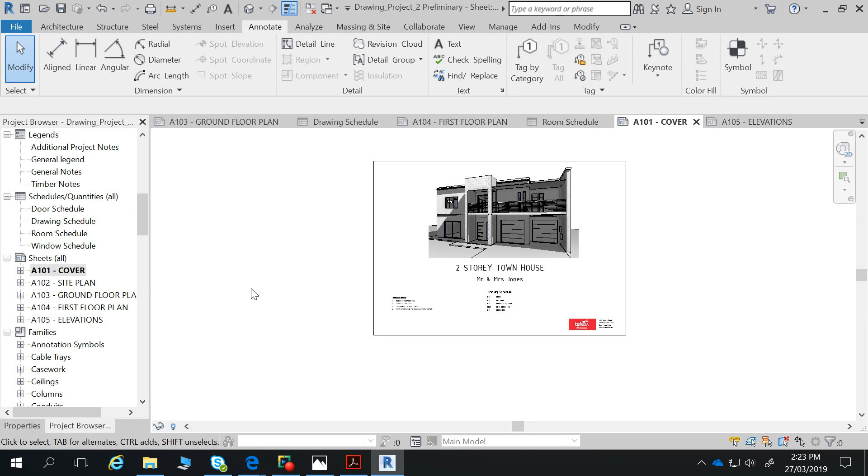This is probably going to be your first preliminary submission. There's just a cover sheet that's got your sheet of what you're going to be doing, and the site plan.

For the preliminary, I don't mind if you just plot the example one and put proposed residence, because all that stuff's already been decided in the design, that it fits on site and so on. Don't waste time drawing something that's already there. There's already a CAD plan, so you could import the CAD plan, move it around your house, and label it proposed residence, and that would be fine.

Then when we go to the next stage, we can use that CAD plan to take the contours and those sorts of things off, because that's sufficient for planning development.

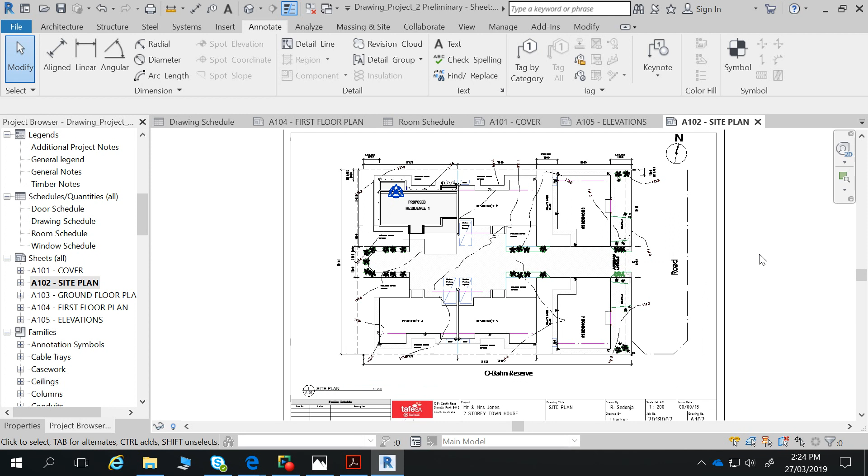For the ground floor, you won't necessarily have to have all the kitchen details or tiling done, just your room names. Maybe start having a look at your legend and some wall types so council can see what the material is, and just a few dimension strings around each side.

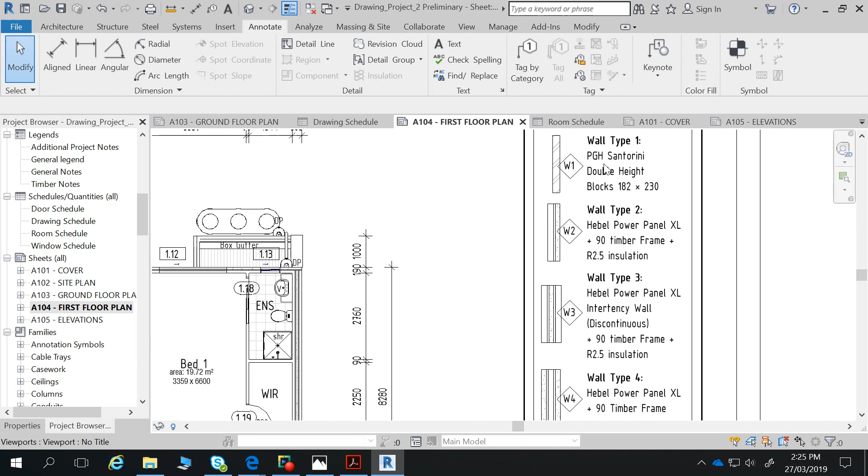So both levels, first and second. There's 4 wall types, plus the internal, plus the portico brick wall listed. Wall type 1 is the Santorini brick or block, wall type 2 is the power panel, 3 is the intertenancy wall, so that's the party wall there.

There's 4, different to 2, at 90. So 4 has got... this one, I believe. It's just another layer of Hebel on the inside of that wall versus the outside of that wall.

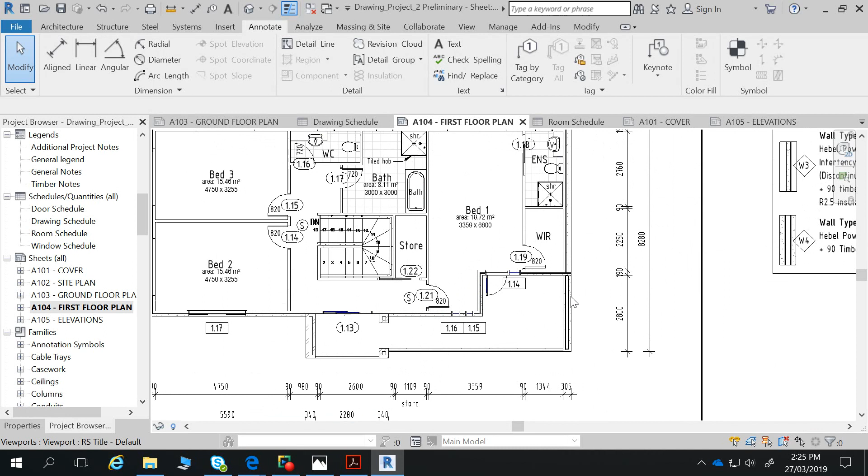Don't worry too much about that one at this stage for planning. You can just make sure you've got the party wall shown, and then the other walls.

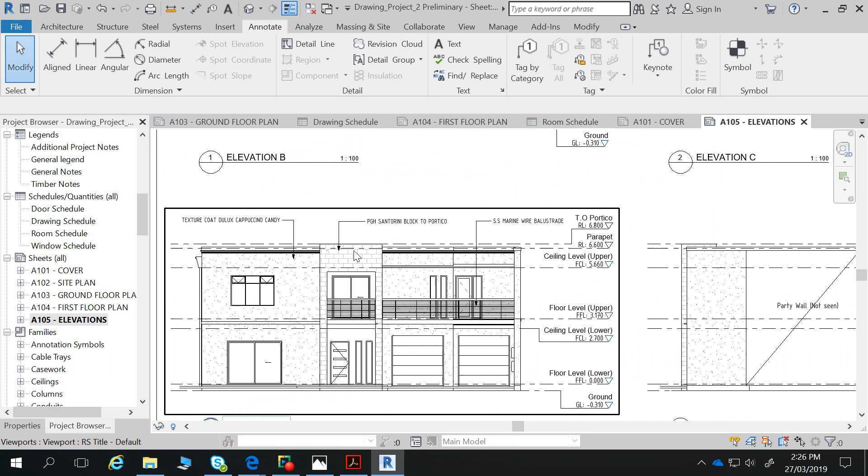For your elevations, just a couple of notes, not too much—what the colour is going to be at the front, there's marine wire and the blocks. That's really all council's looking for in the first instance. It'll tick planning: setbacks for the site plan, height of the building, what the elevations look like, and they just need to know the colours and materials.

So that's really as much as you need to submit for preliminary.

Obviously that's a fair bit of work to get your elevations to actually look like that, with garage doors and so on. But even if you just put a standard balustrade in to start with, don't worry about using a marine wire one yet, because I have to show you how to do that. Just put a balustrade and label it marine wire balustrade—council's not asking for details of it yet, then we can swap it out and do the actual balustrade, since we'll need to nominate the distance between marine wire and the height on one of our details.

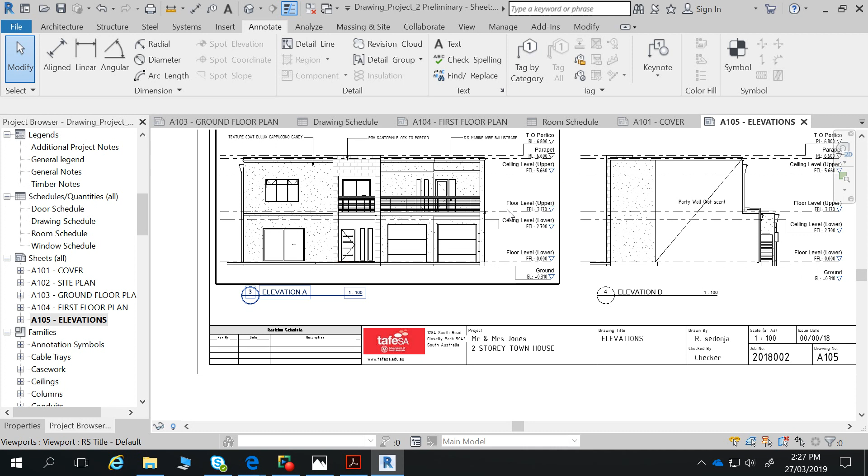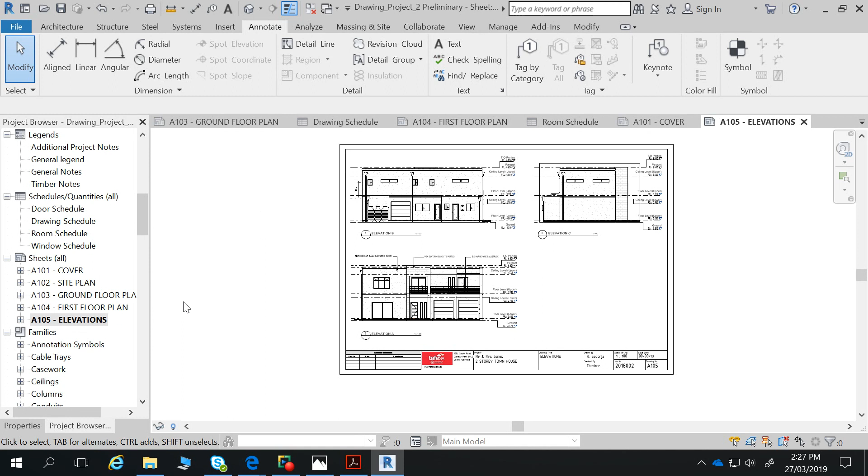You don't necessarily even have to show this elevation, since it's the one joining the other wall, so I'd tend to just get rid of that one and have those 3. But if you've got it there and want to show it, that's fine, plus obviously your levels and things like that. So that's where you're heading over the next week or so to finish those.

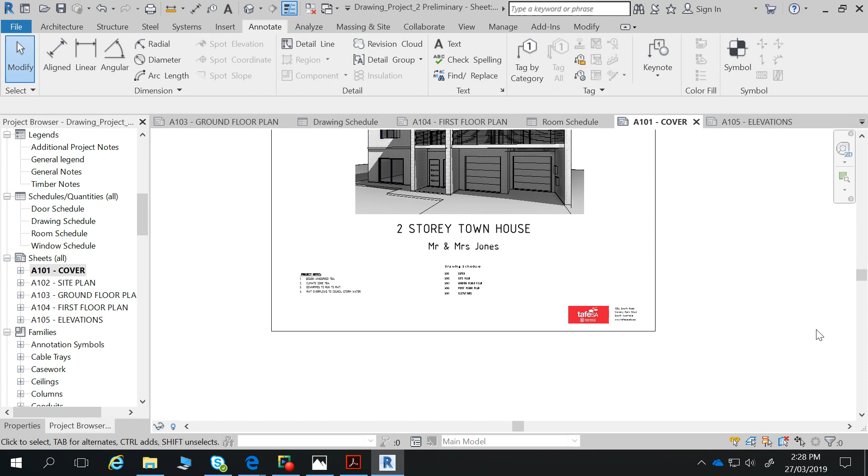Any other questions about this project at all? Looking at where you're all at, this is where we probably should have got to today, so everyone's going well with their timelines.